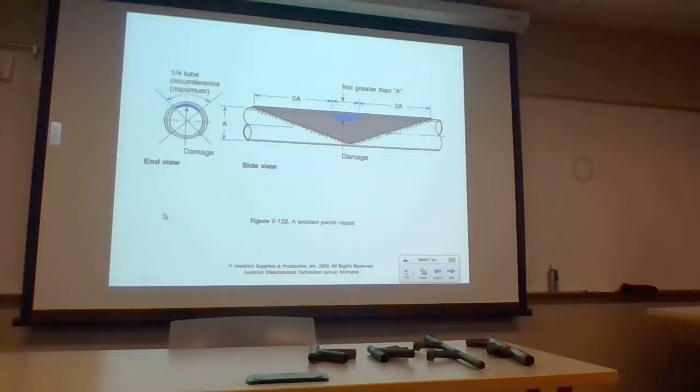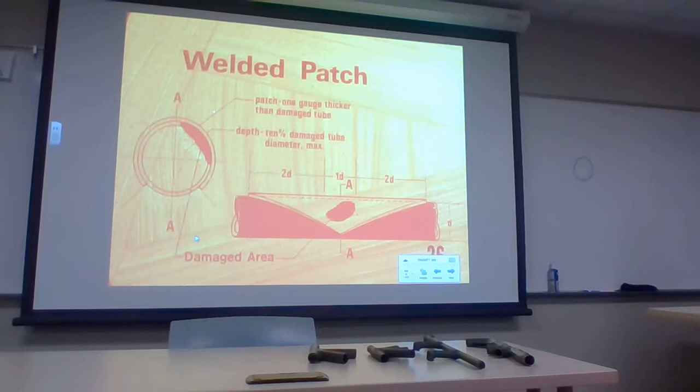I did an old slideshow presentation years ago. The cassette tape would die a couple of decades back. This shows you what they did for doing the repair.

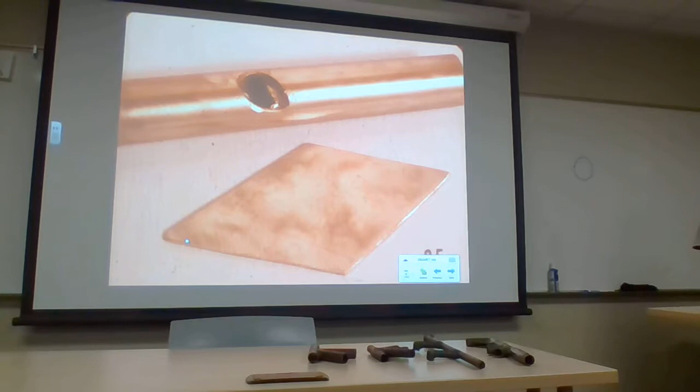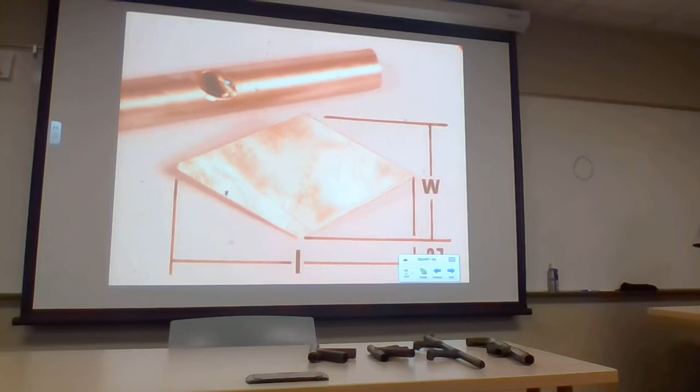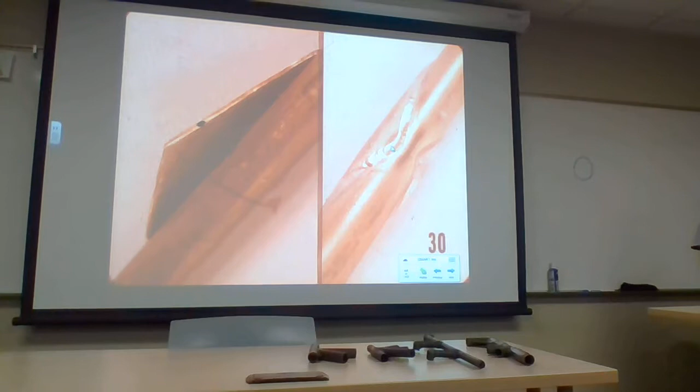So what they do is they dress out the holes so the rupture is somewhat confined, trimming the area of the hole. They fabricate a piece of flat stock to the dimensions required. From the edge of the hole going forward and after, they have 2 times the diameter of the tubing. They put a short bead on either end of it, then use a hammer with heat to bend the flat stock around the tubing, and weld on opposite quadrants to repair it. It's somewhat complicated, not too complicated to do, but it takes a little finesse. That's one type of repair.

Another repair that might be done for tubing is where the damage is beyond the limits specified for a welded patch. They use a sleeve. Sleeves can be either split or solid, and the decision is based on whether you can get the tubing around over cluster welds. So you might take a piece of tubing and cut it in two along its length to clear cluster welds on either side of the damage.

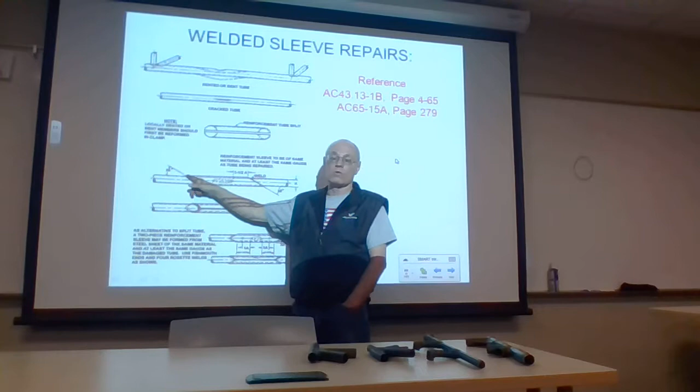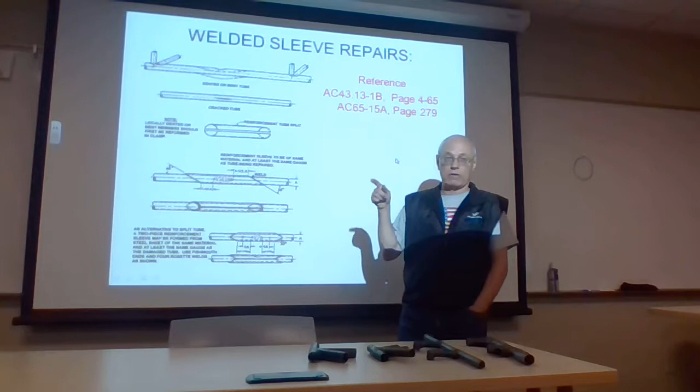Another repair done per AC 43.13 would be a welded sleeve repair, maybe for a longeron. Notice, to increase the surface area for welding, they've got a 30-degree scarf cut in the tubing to give more surface area for the lap weld that secures it. Also, the damage has to be repaired properly - it's not good enough to leave the damage there, you'll have to dress the hole out with a file to fix it.

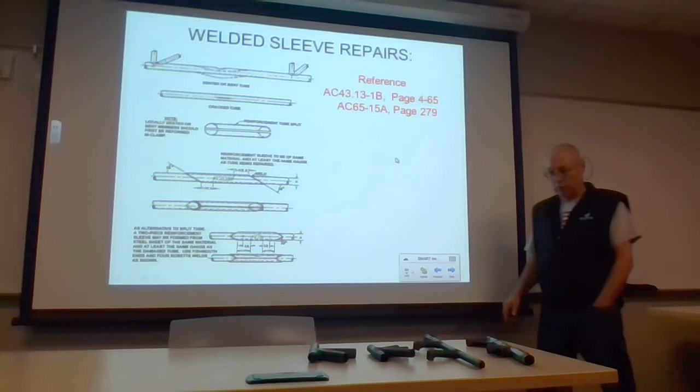Occasionally they'll have rosette welds that position the sleeve in place to locate it. After that's done, they finish by welding around the outside diameter of the tubing at the sleeve, and also along the length where it's been split. There's info in AC 43.13 and also 65-15 alpha showing how it's done. It can be used for bent, cracked, or dented tubing, though you still have to straighten the tubing out before using this type of welded sleeve. But it's an option.

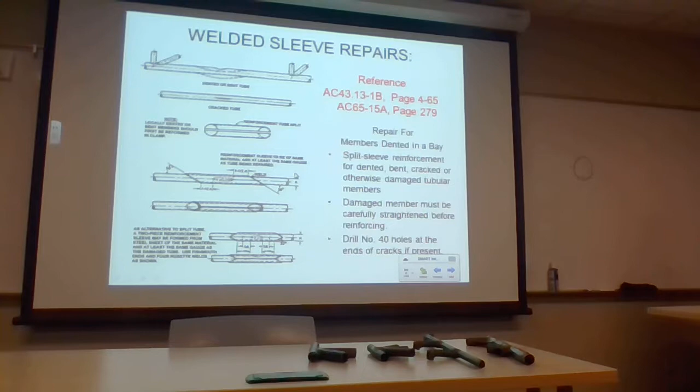Again, if the welded patch won't work, beyond the damage limits for a patch, here's an example of one. This uses a 30-degree scarf. There are dimensions specified for the length of it - the diameter of the tubing is specified as D, so the sleeve extends out 1.5 tubing diameters beyond it to give adequate strength once it's done.

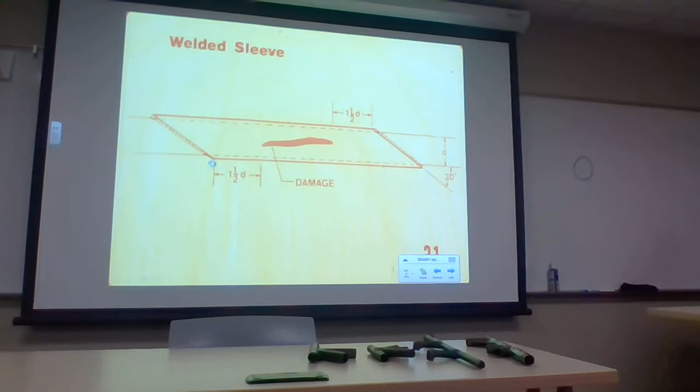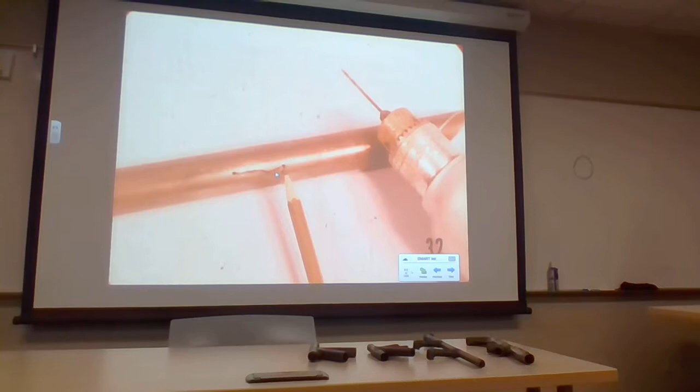If you've got a crack, the ends of the crack have to be stop drilled. They usually use a number 40 drill for most tubing. They don't use 1/8 inch or number 30, but something approximating a number 40 drill works pretty good for at least controlling the crack if one is starting.

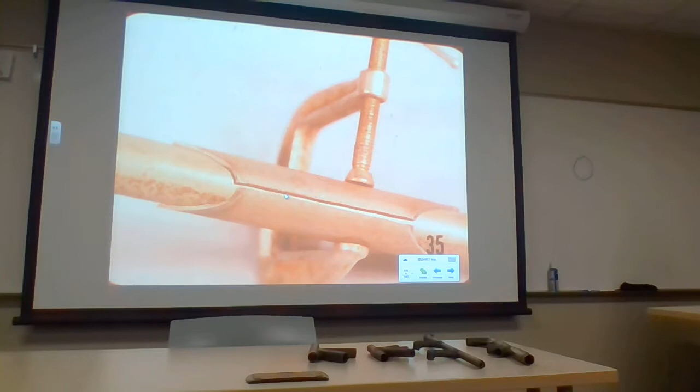They've got a piece of tubing positioned over it, larger in diameter, probably the same wall thickness as the original tubing, preformed around it. This is a split sleeve, and they've got a C-clamp. They're welding up each of the lengths of it, and then later they'll weld around the circumference of both sides, trying to quarter weld it so that it helps hold it, or at least isn't distorted. But again, it's a welded sleeve.

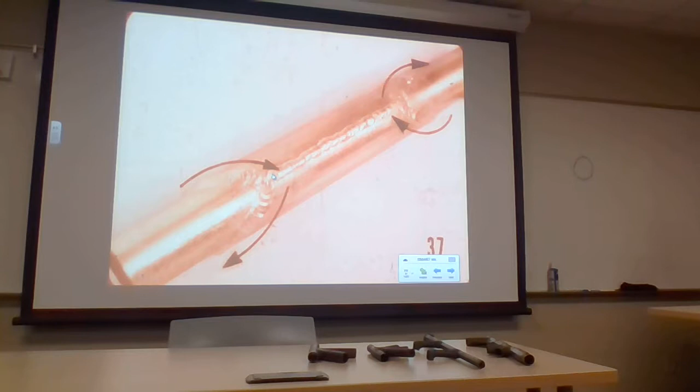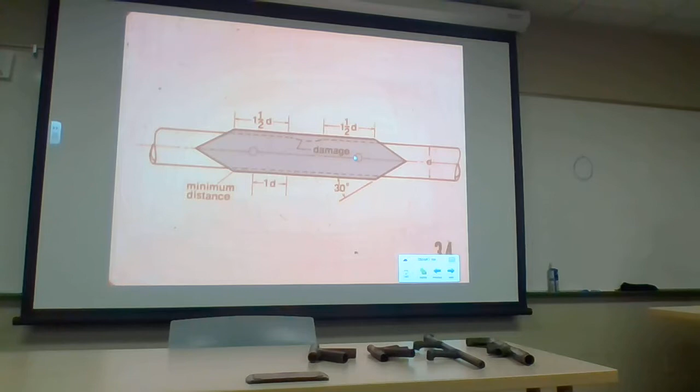If you want to, like when we were doing the butt joint for lab, we had to put on both ends a piece that kept them together. Sometimes what they'll use, since it looks like it's separating apart - it is, it's thin - but what they do in some cases is use rosette welds to hold it. So you can use rosettes if you have to, there's nothing that says you can't. So more rosettes there for that sleeve.

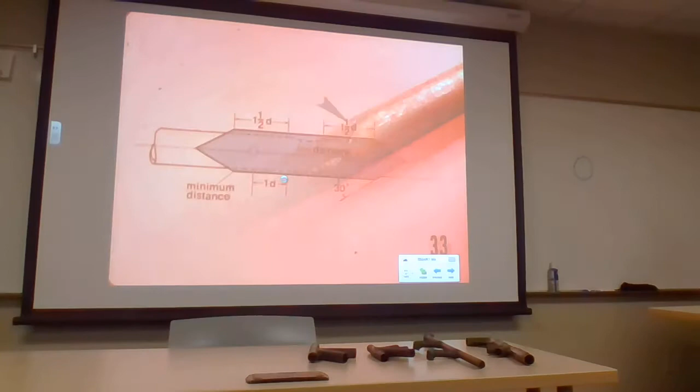Hand-formed sleeves, you can do the same thing out of flat stock, but again, this is going to be time-consuming. Most people would prefer just to take a larger diameter tubing that fits over it and then split it in two if they had to in order to get it, but there's nothing that says you can't use flat stock to make the patch or make the sleeve.

Next, what if the tubing is so badly damaged that it can't be patched or sleeved? Well, what we're forced to do now is we're actually forced to splice. If the tubing has been so badly crushed, where no sleeve will technically work, or no patch will actually cover the area, what you're going to have to do is you're going to have to splice. What that means is cutting out the damage completely and replacing the tubing with another piece of tubing. So that would be considered to be a splice.

There's three different varieties of splices that can be used for tubing. It depends on the location of where the damage is at. In some cases, if you're trying to minimize warpage from heat, there's one particular splice that will work better for that. In some cases, if you're trying to avoid lumps and bumps that might show beneath fabric, one of the splices will provide for not too much of the weld bead showing, so that it conceals the bead and has less of a bumpy appearance underneath fabric. But at least a little bit different than some of the other types of repairs.

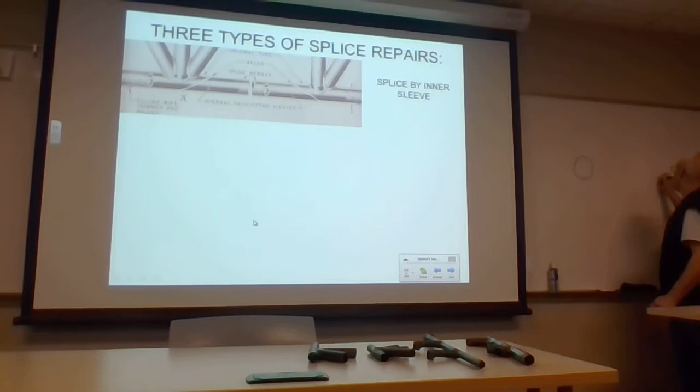So there's one type of splice that's called an inner sleeve splice. And basically what you've got is something that looks like this. Maybe you've got a piece of tubing, you've got cluster welds on either end of it, like this. So you've taken out the piece of tubing, and what you do is you scarf cut the ends of the tubing, like this. And then you're going to fabricate inner sleeves that go inside here on both sides of it. And then you're going to have another repair element, another piece of tubing that bridges the area like that.

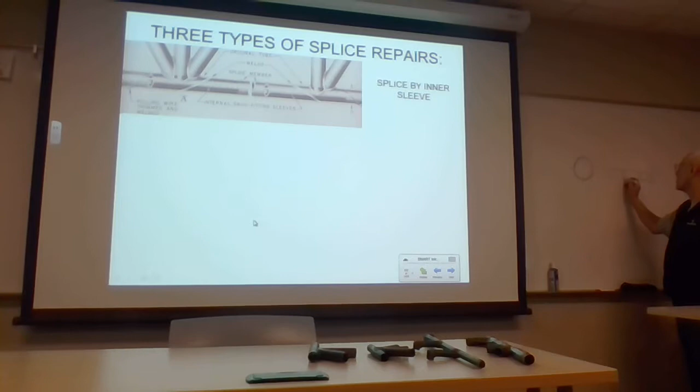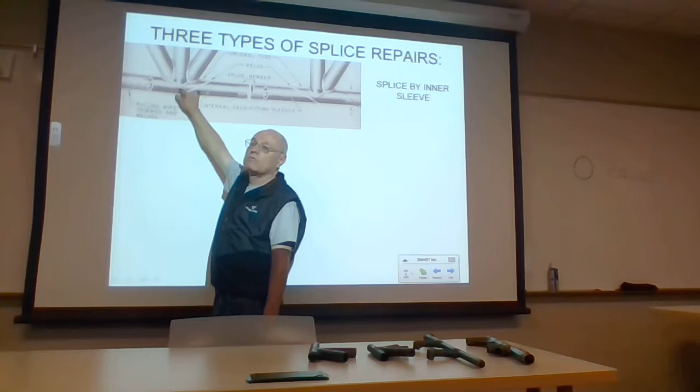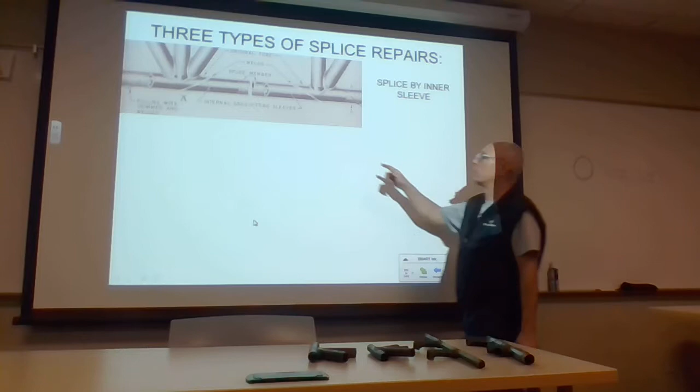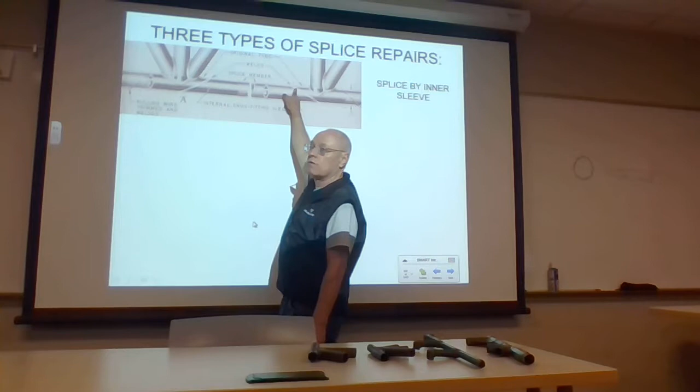So that would be the inner sleeve method of repair. You've got two sleeves that you're going to fabricate out of tubing that slide into the original stub ends. And you're going to have another piece of tubing that bridges the area between the cluster welds. We call this method of splicing the inner sleeve method of splicing. It gives you a relatively smooth finish after you're done, because all that's really visible would be the butt joint of the one sleeve — actually, the lap joint of the original piece of the sleeve to the piece of tubing that you used for the repair, and maybe a couple of rosette welds that kind of stick out from the tubing, and that's it. So it conceals the welded repair area.

I'm going to show you a video in a little bit that shows you the making of this type of splice. But again, this is just one version of splice if you're trying to give a somewhat smooth appearance after the weld has been completed. But it's a splicing by an inner sleeve method.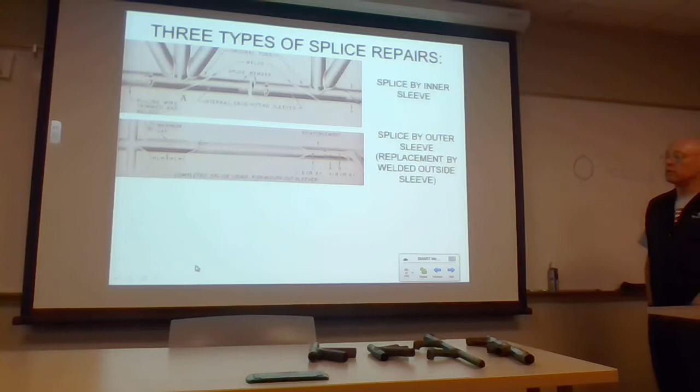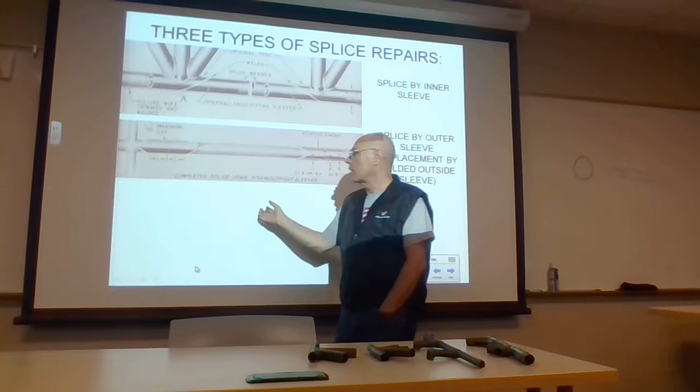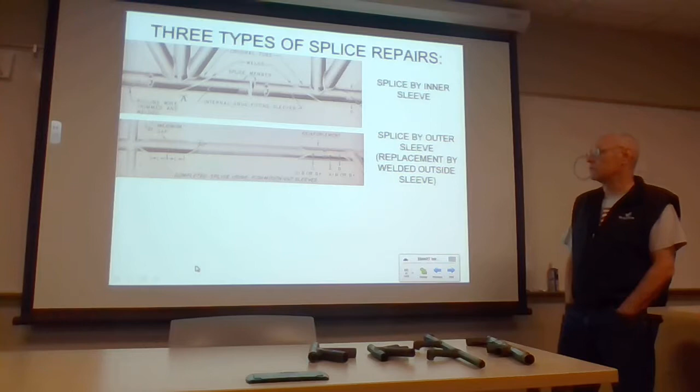There's another method that's called an outer sleeve method. And what this one does is it just has the sleeves, but rather than use them on the inside of the tubing at the stub ends, the sleeves are on the outside of either end of where the cluster welds are at. And they've got a piece of tubing that bridges between the cluster welds. The ends of the tubing are usually square cut. But again, there's kind of a drawback with using this type of splice. The problem is you're going to have a lot of weld beads that are going to kind of show. But again, sometimes you can do it.

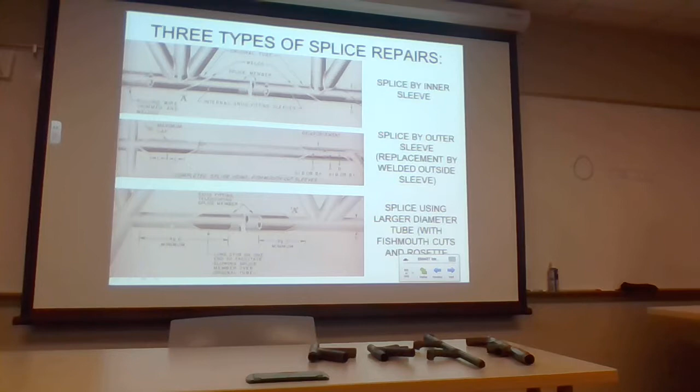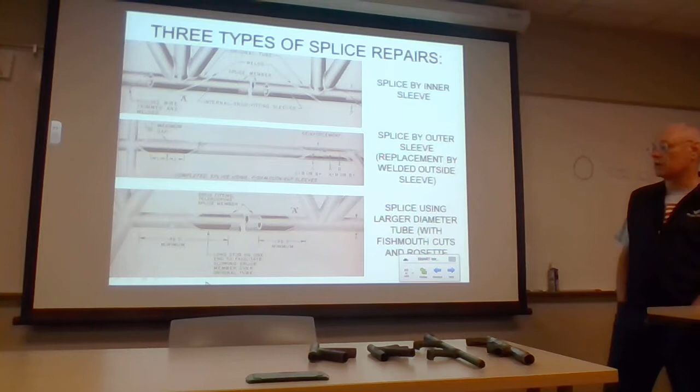There's another splicing method that doesn't use reinforcement too much — it just has a piece of tubing that bridges between the cluster welds that have been created. There aren't really any internal or external sleeves. It's just an outside diameter, a larger piece of tubing that has a larger inside diameter that will accommodate the butt ends that have been cut off on the original pieces of tubing. And with something like this, you have to have enough clearance in order to be able to slide the new piece of tubing on.

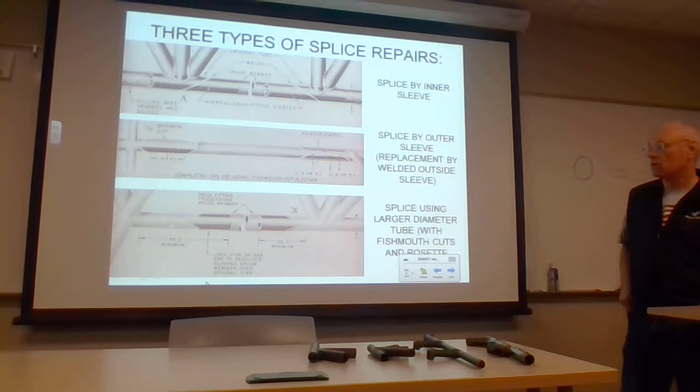So if the cluster welds are too close to each other, it's not going to be possible to slide the sleeves on, or slide the outer sleeve over an area and then bring it back into position. So sometimes if you're working in an area where you've got limited space between the cluster welds, you're not going to be able to use this type of splice.

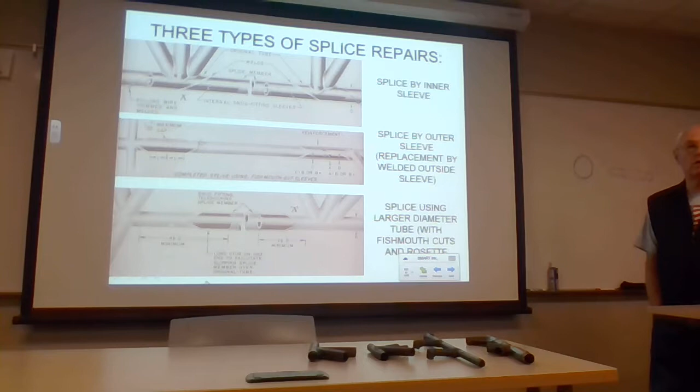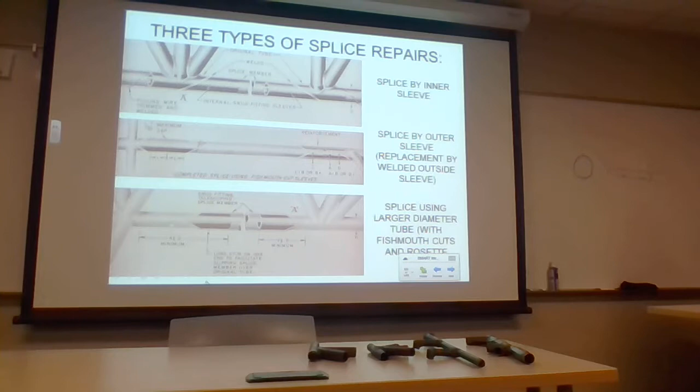But it's sometimes used on engine mount repairs where they've got adequate clearance around cluster welds. You can do something like that. It uses fishmouth cuts and rosette welds in it, but really there's no sleeves involved. It's just a larger piece of tubing that bridges the area between the two cluster welds.

So that's it. Here's a picture that kind of gives you the overview of each of them. The inner sleeve method: you've got two internal sleeves inside of the stub ends, bridging the area between the cluster welds with another piece of tubing that's the same as the original. Splicing by outer sleeve, as the name implies, you've got two sleeves that cover or bridge the area between the cluster welds.

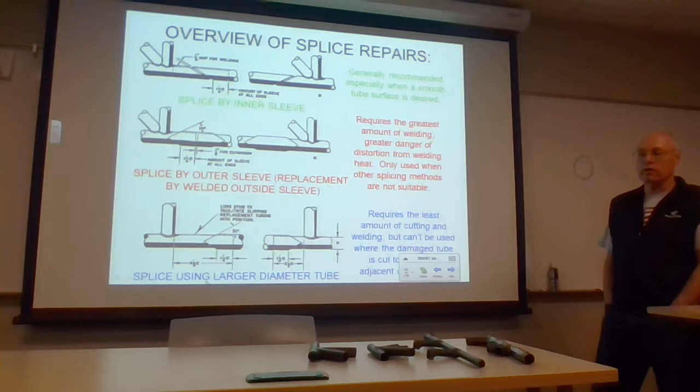That requires the greatest amount of heat. There's also going to be some damage or potential damage from warpage. You've got a lot of welding going on with something like this, so be prepared. If you don't have adequate clearance between the parts, you can create a lot of warpage when you use that method. And then lastly, if we're trying to control heat with the least amount of welding, this would be suitable like for an engine mount repair. They use an outside member in order to bridge the area between the cluster welds.

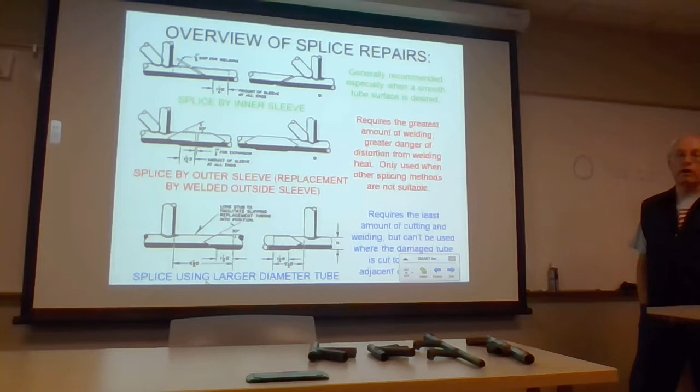Requires the least amount of welding, so we're trying to hold alignment for an engine mount where maybe the connection points have to be precisely located. Well, that would be probably the choice of types of splices to use for engine mounts. So splicing with a larger diameter tube.

Okay, here's some pictures that came out of a different book that kind of show you the details of using this inner-sleeve method. It's time-consuming because you have to fabricate all of the internal sleeves and the bridging sleeve, or the bridging piece, before you can do any welding. So it requires quite a bit of work.

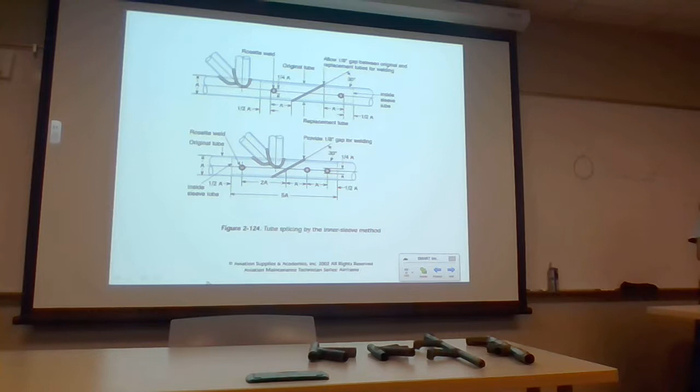Here's the inner sleeve method, really showing you one of the internal sleeves. You would have a mirror image on the other side of it. So again, this just shows you one of the inner sleeves and the continuation of the bridging element that goes between the cluster welds.

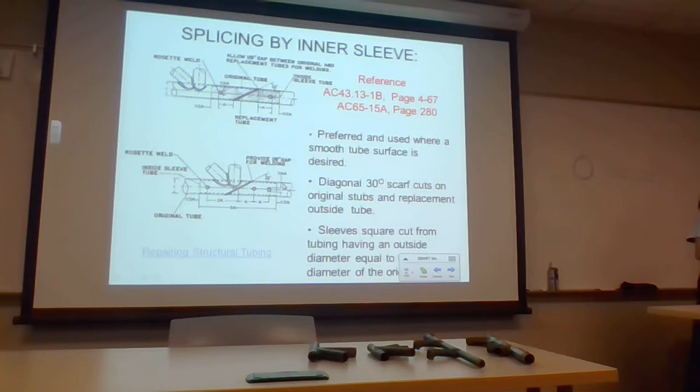Usually 30-degree scarf cuts are used in order to make the new tubing fit into position. And again, it shows you one half of the repair, so again, you've got an internal sleeve.

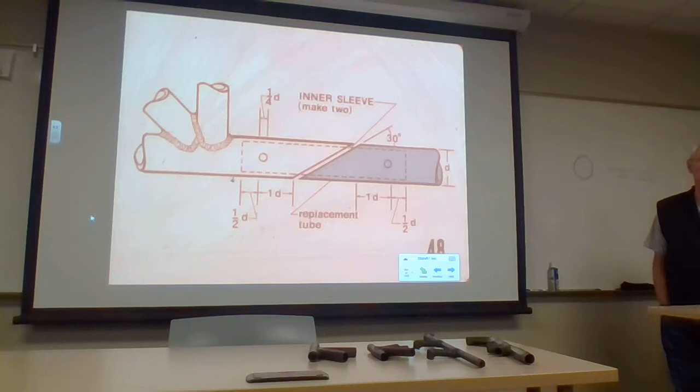There's a trick of the trade too that you might want to remember. You're going to have to locate that inner sleeve and position it. And what they do is they use the rosette holes in the tubing in order to use a pick to get the sleeve positioned where it has to be, in order to insert or at least get it located where it needs to be.

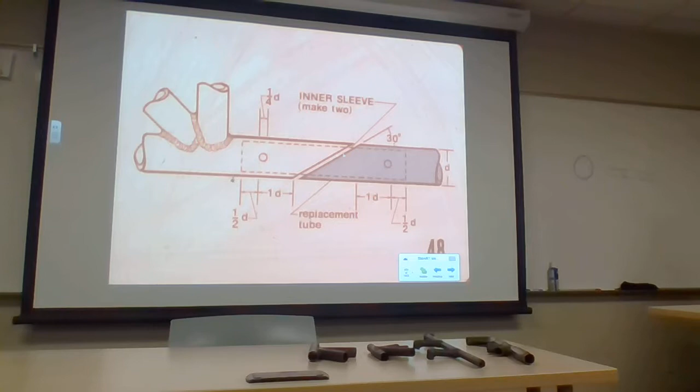In the video that I'll show you, they'll show you how to do something like that. The other thing you might do is you might want to tack maybe a piece of welding rod to the sleeve, and you can pull it through the rosette hole to locate where it has to be. But it does have to be positioned between the area that's been cut out for the splice and the stub.

So again, it has to be positioned correctly. And again, here's a sample. So they've cut out the damaged piece of tubing, and they've got the stub ends that are left. What you're going to do is fabricate a new piece that looks like that. But you're also going to have to fabricate internal sleeves that go into each end of it, so those are going to be hidden after the repair has been done. And there's one of the internal sleeves, and it's going to have a lot of rosette welds to kind of hold them in position.

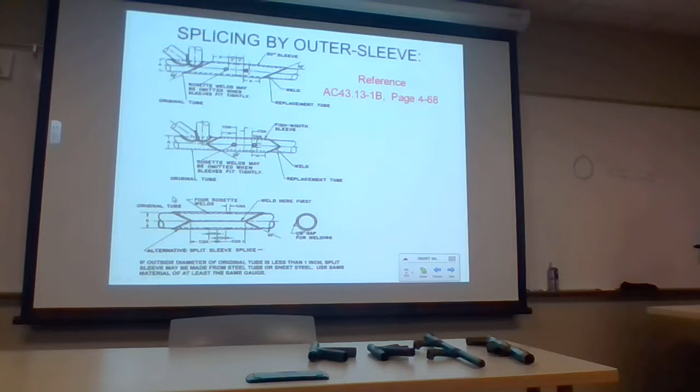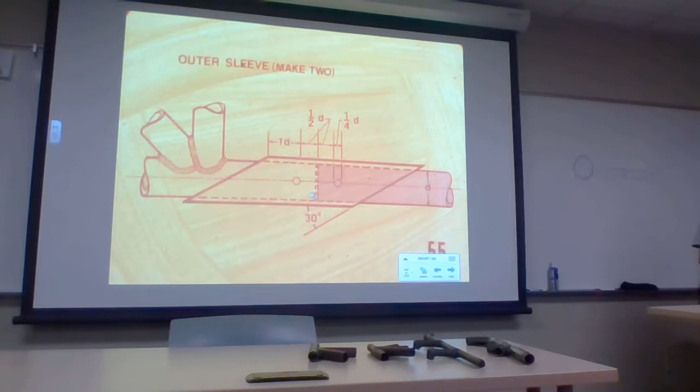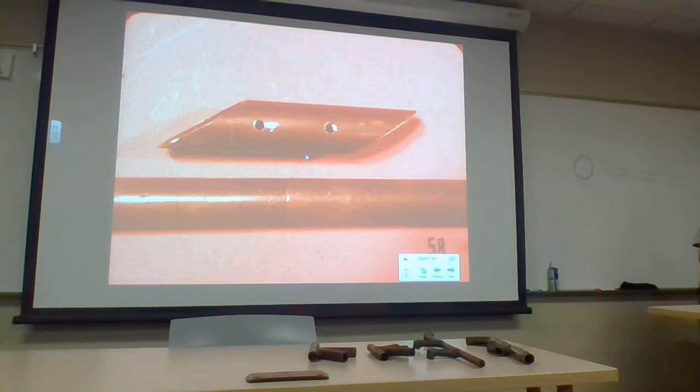The outer sleeve method uses external sleeves on this type of repair. The stub ends are cut square, and the part that goes in the center matches the original tubing that's been cut away. You've got sleeves on the outside, with one stub length longer than the other. This allows you to slide the sleeve on and get it into position. Here's the replacement part, with external sleeves that have rosette holes in them, placed at each end of the repair.

Is there some sort of jig used to make sure you're not messing with the alignment? No, but you could use a jack, just like I showed you. If it's being done on the aircraft in place, you just use a jack to hold the rest of the airframe in alignment.

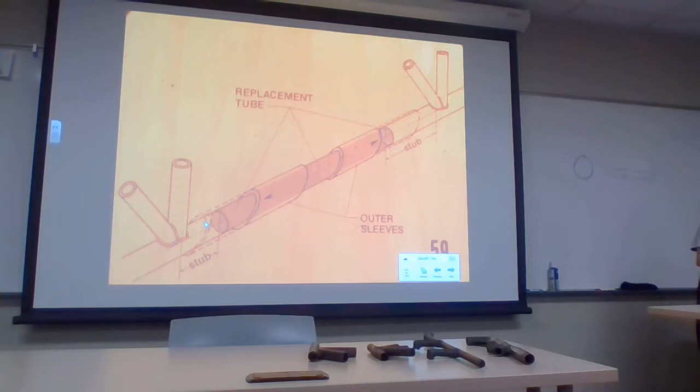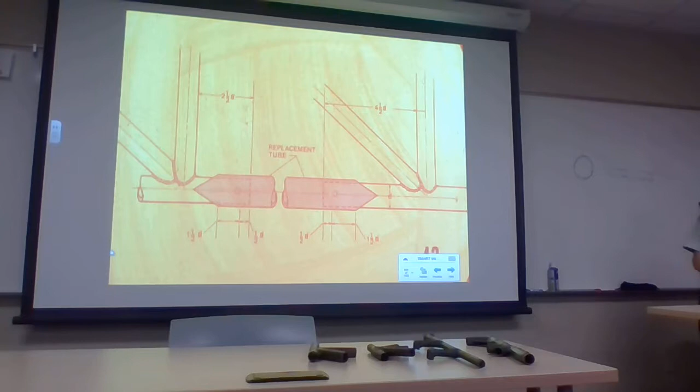Those are the external sleeves. For external tube only repairs, they usually cut one stub end a little longer than the other so they can slide the sleeve over one end and then pull it back the other way. There's a piece of tubing that bridges both areas - they slide it on one end and pull it back the other way. But you have to have enough distance between the cluster welds to allow that. If you've got a short distance between them, it's not possible to pull the sleeve back fully one way without a split on the other side. So there are dimensions specified for the length of that particular splice.

There's another patch that can sometimes be done to tubing - this is really not a splice, it's another type of patch. If you've got a cluster weld with a dent in the longeron, it can sometimes be repaired by a welded patch plate. This looks a lot like a glove, that's the best way to describe it. There are fingers that extend up on both the vertical and diagonal sections of the tubing, and what it does is glove the repair area.

This patch can be fabricated out of flat stock. They take a die grinder and a piece of flat stock 4130, create holes at the webs where the fingers are with a drill, and then create the fingers with a die grinder. It takes a little practice to do it. I've got a sample of that - I'll bring it in at break to show you how it's been done.

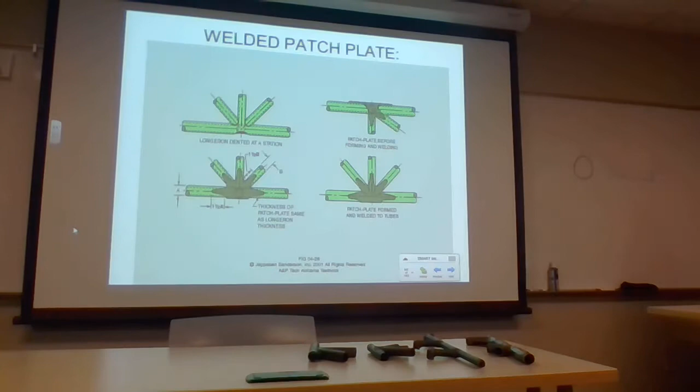If you're having issues with those fingers breaking off, do you use that patch to strengthen the weld? No, no. In that case, you're going to have to repair the individual diagonals and verticals that are actually broken. This glove patch is only used when you've got a dent in the longeron.

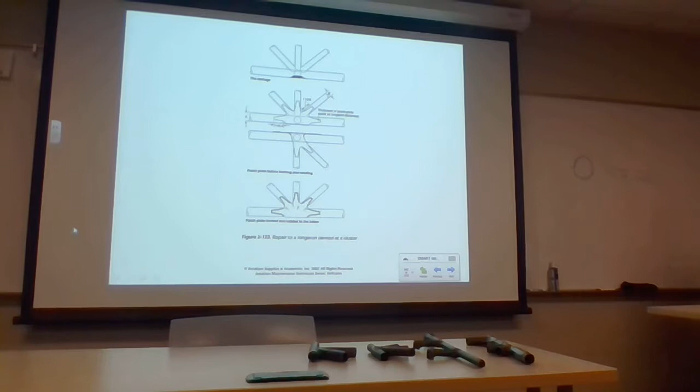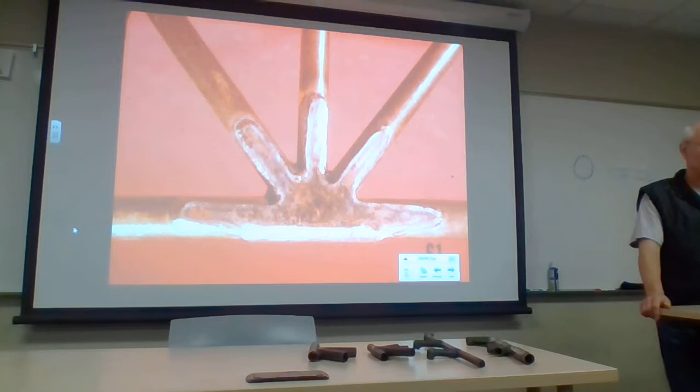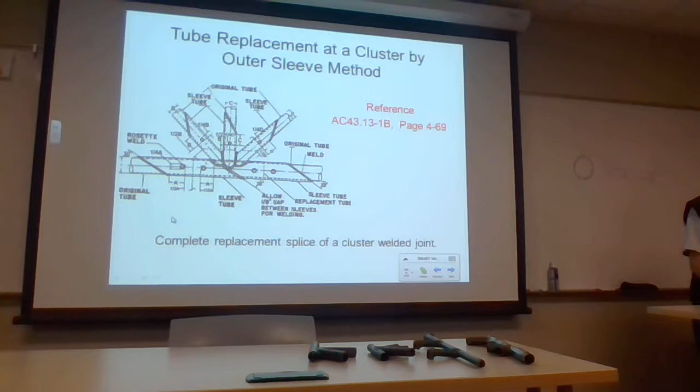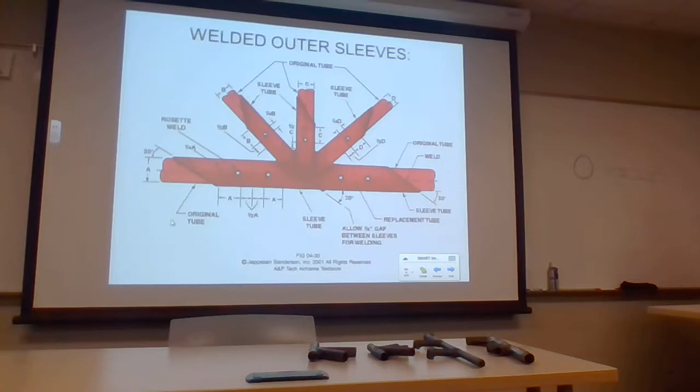Something like that, where you've got a damaged cluster, that's what you're going to have to do. The simplest solution would be to get a new airplane. You're not going to be able to patch that at all - you're going to have to cut the entire cluster away and create sleeves that will bridge the area. So what they do is something like this.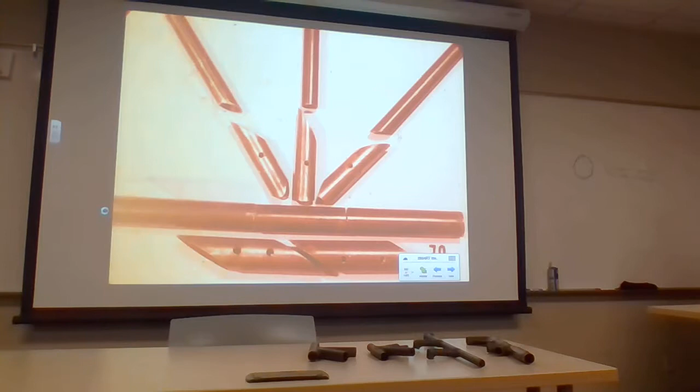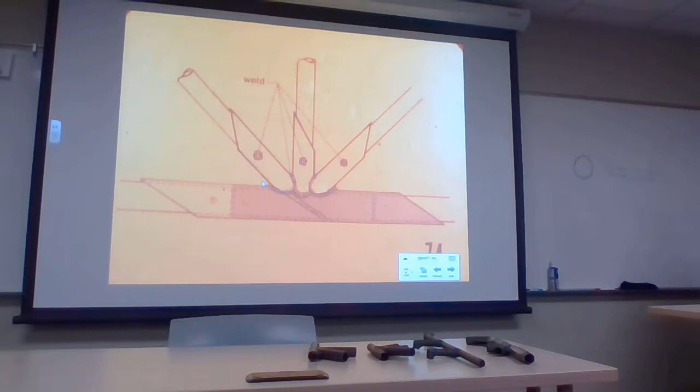There's a procedure for actually doing something like that. They're trying to control expansion and contraction the best they can. You can see they tack weld the vertical in place first, then the diagonals are positioned, and then it's welded around, quarter welded. And then it looks like that after it's been done. But that's how you fix it.

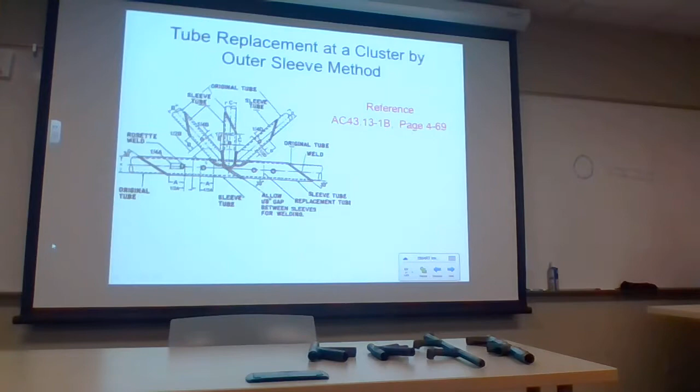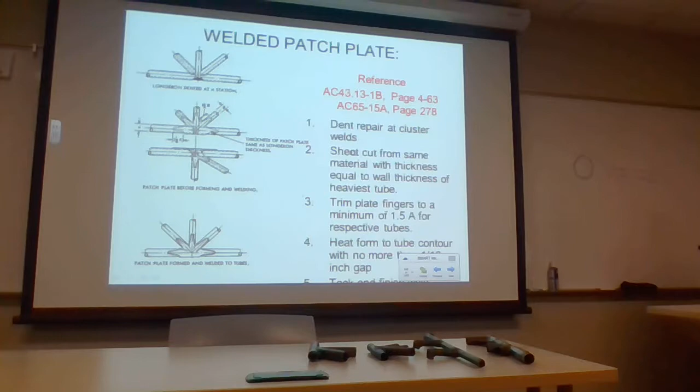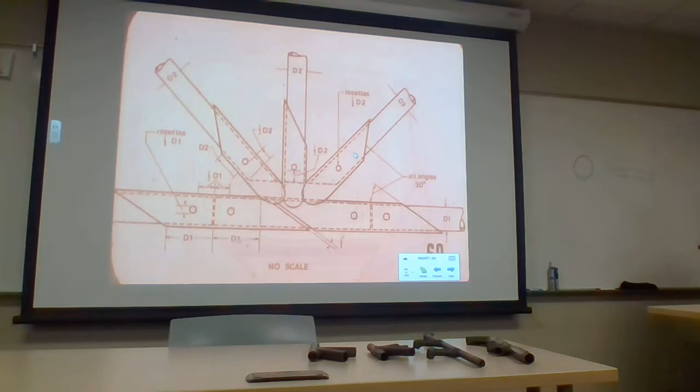So anyway, you've now been exposed to the repairs that you can do in tubing. A lot of times also, we've talked about fuselage type repairs where the tubing has been used, but understand that all of the repairs we've talked about, if the aircraft has got a tubular steel landing gear like a lot of American Grumman's do, like the Tigers in the AA-1 and AA-5 have, all of these repairs are done on tubular steel landing gear.

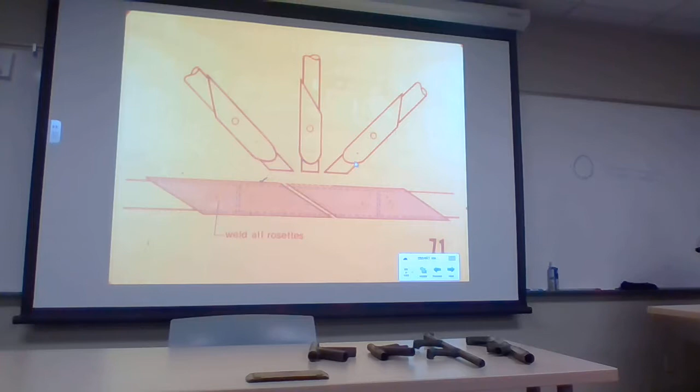Commonly on a lot of the Grumman aircraft, what happens is they rust out. There's very poor drainage in those aircraft, and the repairs you're doing are really the same repairs you do on the airframe, except the damage was caused by rust that created a hole. So again, you're really patching to correct the problem that was created by rust.

What the FAA wants you to know too, life might be easier if they allow bolted sleeve repairs. It's possible, but you can't do it unless the airframe manufacturer specifically says that you can use a bolted repair. When you drill holes in tubing, you're substantially weakening the structure significantly. Even though you're filling the hole up with a bolt shank diameter, it's not the same as it originally was. So unless the airframe manufacturer gives you the okay by saying so in their service manual, you can't use any bolted repairs. The only exception would be an approval by the FAA to do such a thing.

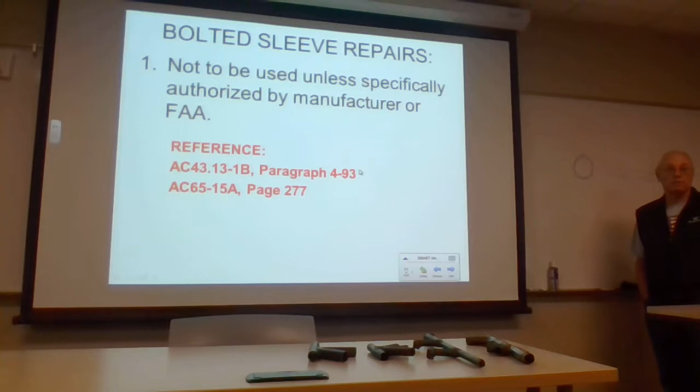So again, bolted repairs are only specifically authorized by the manufacturer or the FAA. That's it. Okay, landing gear again: if it's just 4130 normalized tubing, it can be repaired, no problem. All the repairs I've shown you generally will work for something like that. However, other landing gear, different story.

If it's an oleo strut, you're dealing with fits and tolerances between the cylinders. So again, any type of repair by welding is generally not approved to do. Oleo struts generally can't be repaired using that method anyway.

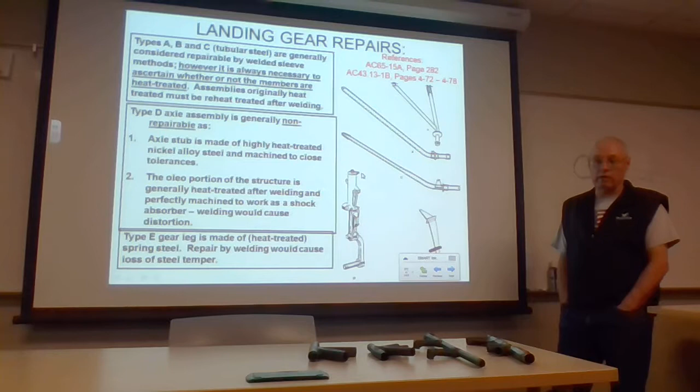Same thing with spring steel struts. Spring steel struts on aircraft are heat-treated 4130. If they're cracked, you've got a big problem. They're usually replaced as matched sets from the airframe manufacturer. You can't buy just one. So you're going to have to replace the spring steel strut.

Also, you should know something else too. Those spring steel struts are usually treated by shot peening. The shot peening process is a method of stress reduction in the steel structure. And any type of finishing work done to that, maybe removal of rust by any other method, may weaken that particular structure, so you have to be very careful around it. If you have to blend a little bit of corrosion or rust out of it, sometimes you can significantly weaken it.

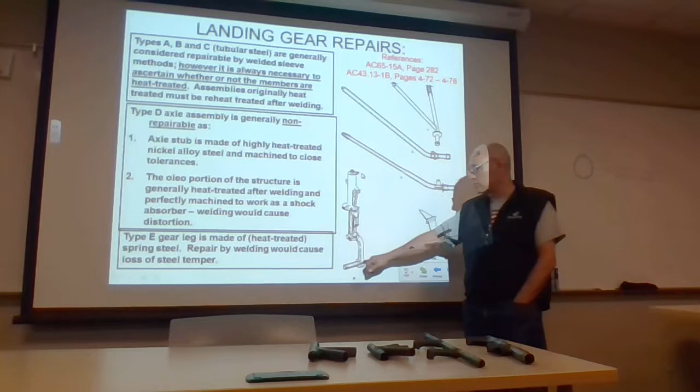But most of that structure has been heat-treated 4130, not repairable by welding. Same thing with the axle assembly on a lot of oleo struts. These are usually made out of nickel steel and not repairable by welding. So again, oleo struts or stub axles or heat-treated spring steel are generally not repairable by welding. The only repair would be by replacement. That's pretty much it.

Okay, something else we might want to talk about too. We briefly talked about the concept of normalizing and repair work. There's a lot of people, myself included, that believe that after welding has been completed, the structure should be re-normalized, and I believe in it. It's quite possible to do that with an oxyacetylene torch.

You need a larger torch tip. You need to heat the area up until it's bright red and hot, and cool in still air. However, if you're welding by an inert gas welding process, the TIG welding equipment does not directly permit normalizing tubing. It's a dedicated type of welding process that will weld, but you're going to have to normalize later. Some people say they don't do it, but again, if I were TIG welding or MIG welding the tubing, I would come back to the oxyacetylene torch and normalize that area before I return the aircraft to service. So again, just for stress relief.

Any questions you might want me to talk about? Anything at all?